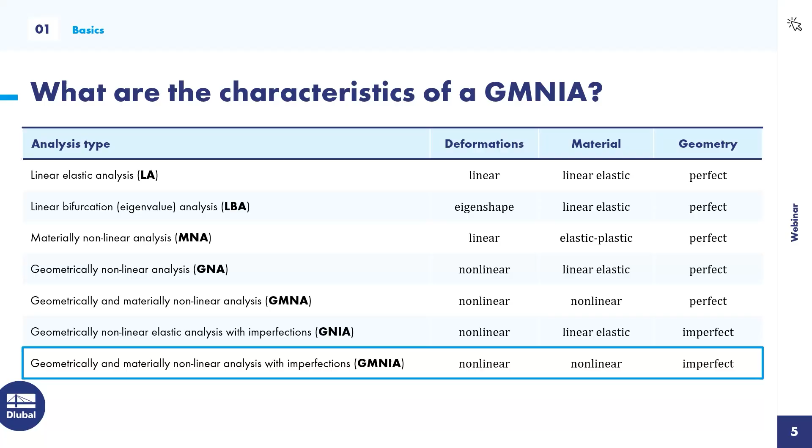Some rules for the application of the finite element method in this context are given in Eurocode 3 Part 1-5 Annex C, and this will shortly be replaced by a dedicated Eurocode dealing with finite element methods and their application for steel structures, bundled in Eurocode 3 Part 1-14 in the second generation of the Eurocode. I will refer to this new code as well during this presentation.

You can think of the GMNIA as a virtual capacity test, which means that the design load is increased by a load factor until a clear state of failure is reached. Two limit states are defined in Eurocode 3 Part 1-5 for the definition of failure and the determination of the critical load factor, which is the minimum of the following.

The load factor when the maximum of the load deformation curve is reached, as shown here on the left side of the slide, and the load factor when a maximum value of the principal plastic membrane strain is reached. This is usually given by the annex or the base code as 5%, which is tolerable, but there might be some additional requirements in the national annexes.

The critical load factor is then the minimum of those two alpha U values, and this is then checked against the product of two safety factors on the resistance side, namely alpha 1, which describes the uncertainty of the numerical model, and alpha 2, which describes the uncertainty of the load and resistance model.

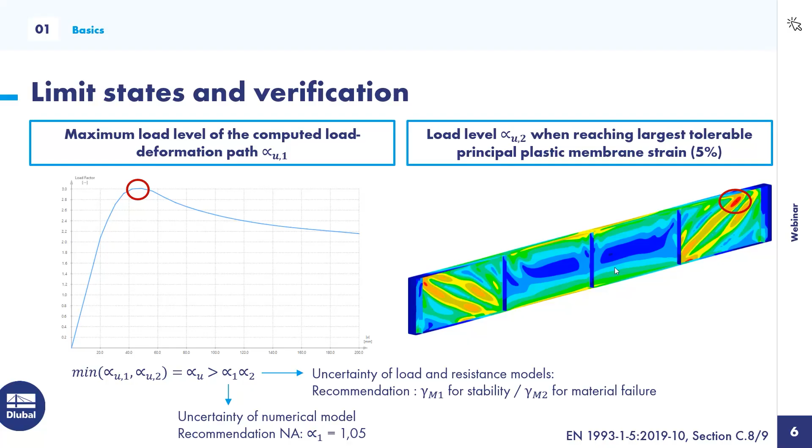So let's move on to the description of the design example for this webinar. We have a welded plate girder with a total length of 18 meters, simply supported at its ends. There are some virtual purlins that are not explicitly modeled that rest on top of the top flange at the ends and also in the quarter points, transferring loads from the roof structure maybe to the plate girder and also at the same time supporting it laterally.

To avoid local instabilities at those load introduction points, we place stiffeners below them, and we should also take care that the end posts or the end stiffeners are detailed as rigid end posts, so they can anchor back the membrane forces and avoid excessive deformations of the external shear panels.

The cross-section is shown here on the left side, so we have a very slender web plate with a height of 1 meter and a thickness of only 5 millimeters. And the flanges have dimensions of 20 millimeter thickness and a width of 360 millimeters. The material is a mild steel S235.

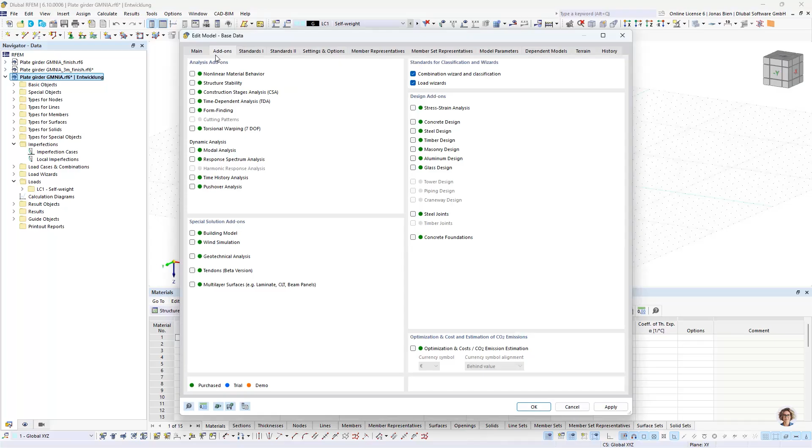All right, after we clarified this, let's go into the program and start modeling this. So I have already prepared a fresh file where we can now introduce the plate girder. As you can see, I have no objects here whatsoever, and also if we look into the base data of this file, there are no specific options activated. It's all a standard type of model, 3D and so on.

Okay, so first of all, let's start with the material. We said we want to use an S235, so let's choose one. I always like to choose one that is related to Eurocode 3, but another one would also work.

Then let's move on with the modeling of the member itself. We could either directly go with the surface definition and try to place the flanges and the web plates in the correct locations, and also then we have to assign the correct thicknesses and so on. But we can also use another way. We can first start with a member that has the correct cross-section, and then we transfer this member into a surface model.

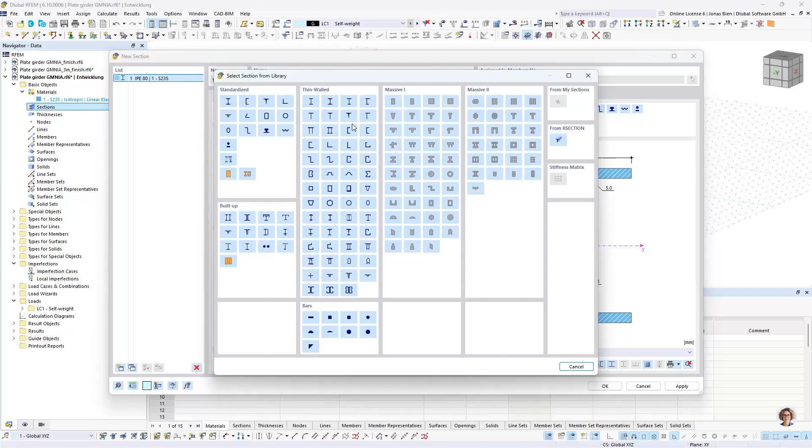So I start with defining a parametric welded double symmetric I section in my section dialog with the respective dimensions that I want to have. So height is 1020 millimeters, width 360, thickness of the web would be 5 millimeters, and the flanges 20.

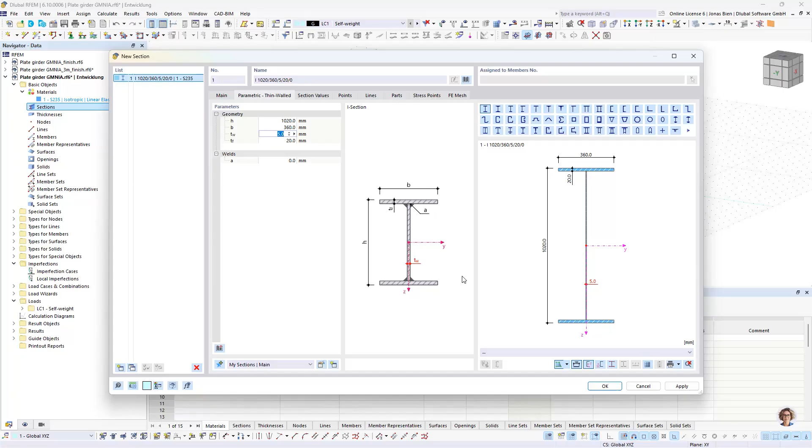So now it more or less looks like the picture that I have shown on my slides. I accept via OK, and then I just place half of my plate girder in the model. So one span was 4.5 meters, so I want to take in the initial model 2 panels, and then we can later mirror it.

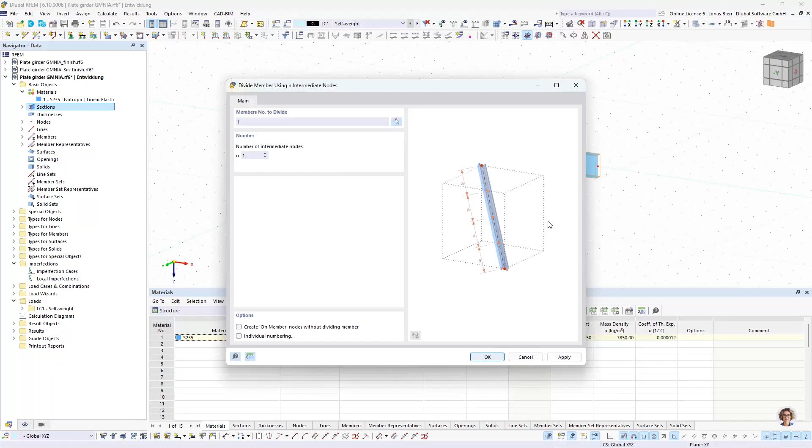So before I generate surfaces from this member, I also divide it, because I want to have a stiffener and some load introduction lines at the central position here. So I first divide this member with one intermediate node, and then I move on and generate surfaces. And what this does, it already automatically generates these thicknesses that I need to represent this section in a surface model. It creates the nodes, the lines, and finally the surfaces that are necessary for this model. So this is a good starting point, I think.

Next, we want to create the stiffeners to finish the surface modeling part. Therefore, I need an additional thickness of 12 millimeters that I wanted to use for the stiffeners. I can also write a reminder for myself that this is for the stiffener, this is the web plate, and this thickness is defined for the flange plates.

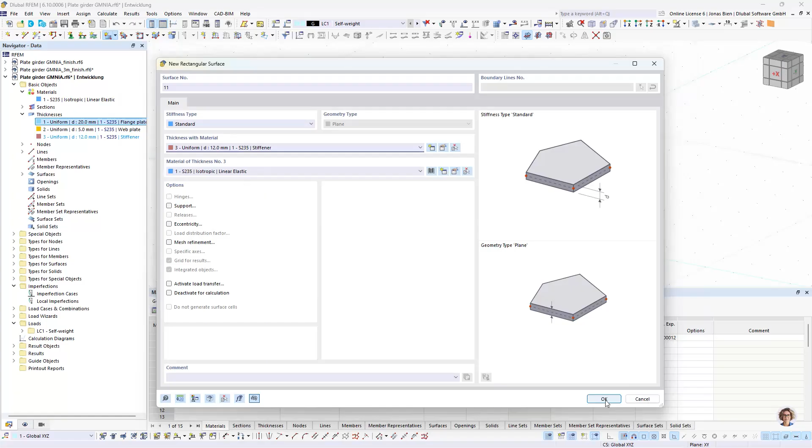Okay, and then I just place some rectangular surfaces in those positions where I later want to apply the loads. If we think about this as being the left half of our plate girder, we also said we want rigid end posts. So I would generate this by adding an outstanding cantilever part here with an additional stiffener to really have a very compact section at the end.

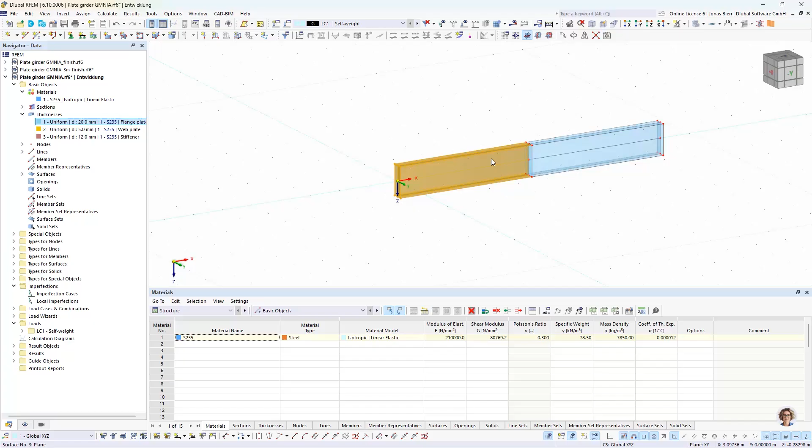I can come to this modeling variant by just copying this panel here to the end, knowing that the length of this is also 4.5 meters. I want to have a very short and compact cell here at the end, so I just move the end section back towards the initial position of this stiffener by, let's say, 4.2 meters. Then I have a nice rigid end post without needing to define additional surfaces by hand.

Oops, didn't mean to do that.

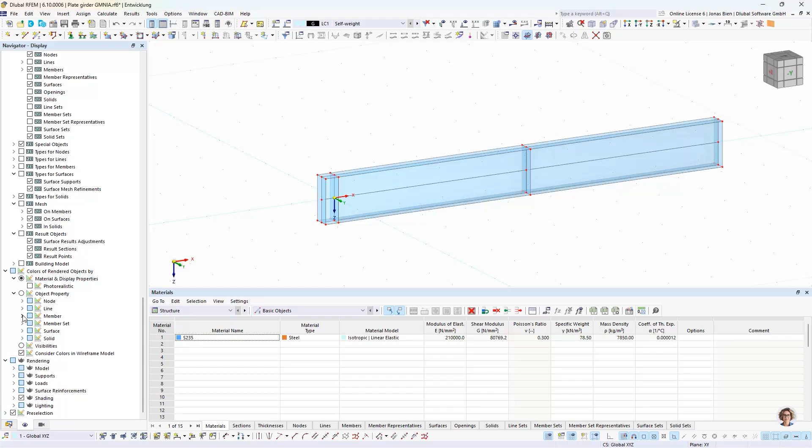So then we can check if we assigned the correct thicknesses. I always like to check the rendering based on thickness, so we get a nice overview of what thicknesses are represented in the model and where they are. This seems all fine to me.

So we can continue with assigning the supports. I want to avoid singularities at the vertical supports, so I try to use line supports at this second line of the stiffener here. I just want to support this line in Z direction, without restraining any deformation along the line or in transverse direction.

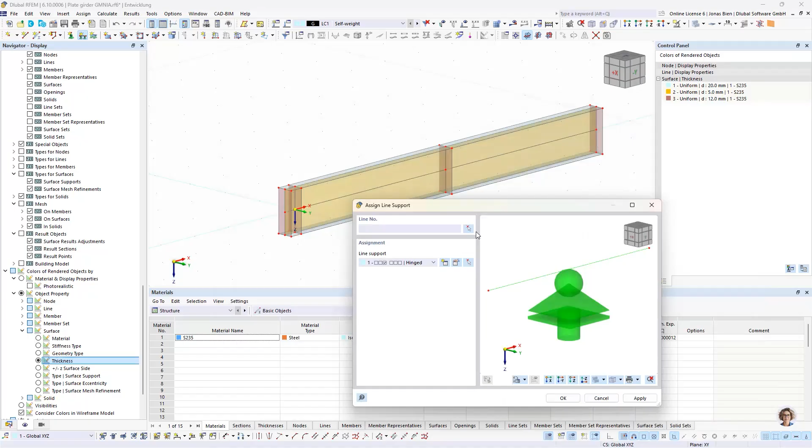I already see another problem because we defined those rectangular stiffeners over the existing surfaces, so we have some double lines here. We can quickly merge them by cutting and merging via this tool, and now we have single lines in these locations. That's a quick fix, so now I move on and assign the vertical supports at these two lines.

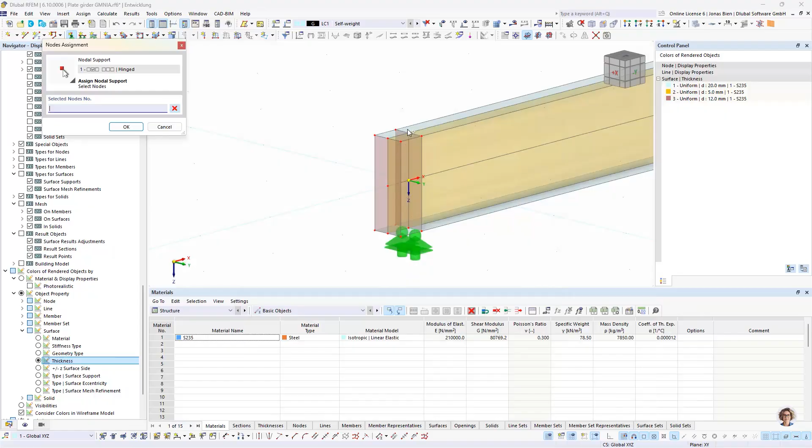Then I need to take care of the lateral supports. These I assign as nodal supports at some points that are very stiff. First of all, I have my lateral supports that I wanted to assign at the ends and also in the quarter points. I choose as a point of reference the crossing between flange and web plates and the stiffeners.

I also need to make sure to couple this point in Y direction so it does not tilt, and I also need to somehow support my model in X direction. That's why I also want to define one support in global X and Y direction at the lower flange, like here. So that would also be the respective support conditions that I want for my half model.

I can later mirror them when I want to create the full model. But before we do so, it would be wise to also define the loads, because there we can also leverage the mirror operation. So we go ahead and define our loads.

Maybe one look back to the task description. Here we can already see that we have concentrated loads, 3 different loads, at the endpoints and the quarter points. The first one represents dead weight, the second one comes from snow, and the third one comes from wind pressure.

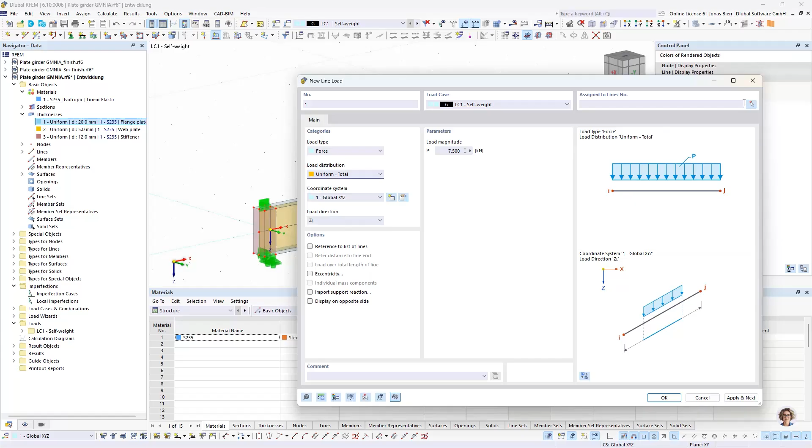But I could also use load distribution type uniform total, where the program does this job for me. I just have to enter the total load that I want to apply over the length of one line. Since I have 2 lines here, I need to divide my 15 kilonewtons by 2 to get the total load for one line. I want to apply this in Z direction, and now I just select those 2 lines, assign this, and RFEM already calculated the correct kilonewton per meter value for us.

If we multiply this value by 0.36 for the width of this flange, then we get 15 kilonewtons in total, as we wanted.

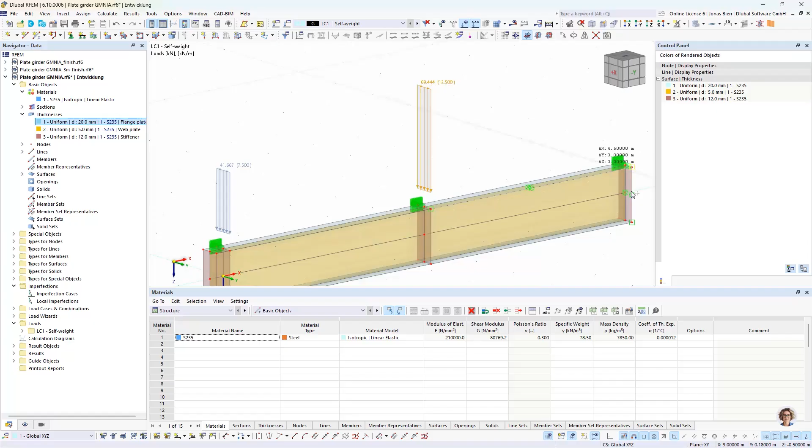Okay, we can then just copy this definition to the internal lines or purlins where the load is transferred to our plate girder. Here we had a slightly higher load, I think it was 25 in total. So each line gets 12.5 kilonewton. And this definition we can also copy to the central lines here.

And now we make a smart move and generate our second and third load case from our first load case. We do this by copying our first load case, which means that also all loads defined in this load case are copied. So we just have to change the action category. Now in the first place, I want to define the snow loads, and we have to take care to deactivate the self-weight if we copy from the self-weight load case. Otherwise, that would be considered twice.

And we do the same for wind, choose the appropriate action category, and click OK.

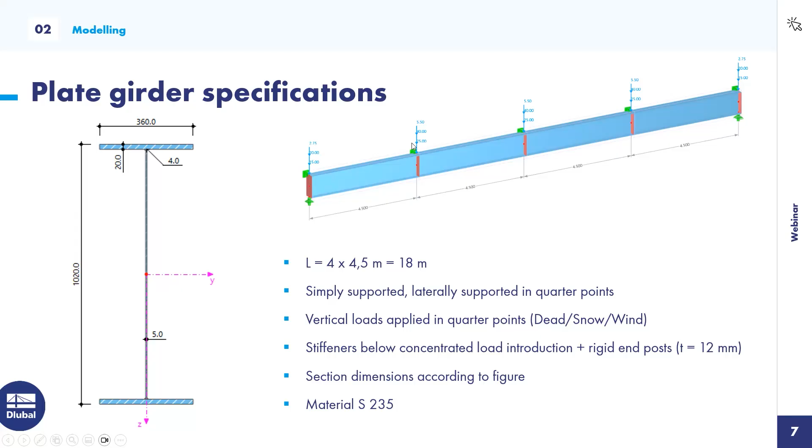And now we can go to the table. This is the easiest way I find to manipulate those load values, because we just want to change values. As you could see here in the slide, we have the same load type for all load cases, just different amplitudes. So for snow, we would have 20 kilonewtons and 40 in the internal positions, and for wind it would be 2.75 and 5.5 in the internal positions. So we just need to change the values basically. Let's do this via table.

For the snow load, we had 20 kilonewtons divided by 2 and 40 kilonewtons divided by 2 in the internal positions, and then for wind it was 2.75 divided by 2 and 5.5 divided by 2. This gives us the respective concentrated load distributed to those lines.

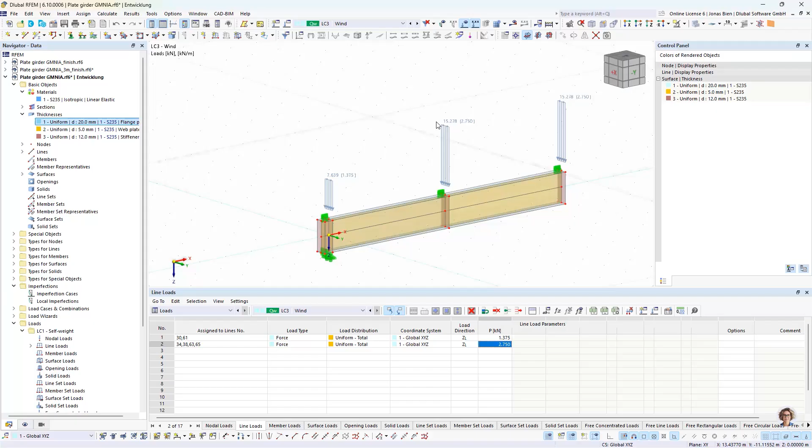All right, and I think then we can already mirror the whole thing. Maybe I don't want to mirror this load here, because we have already defined this for the central position. I don't want to do that again.

And now I mirror all the selected objects about the YZ plane, and the plane should go through this point here. I make sure to copy the included loading and click OK. And now I think by doing so, copying included loading, it also recognized all the loading on these lines and copied it, although I did not manually select it.

So now, as you can see, we have a double load here, and we just quickly delete this. Okay, then I only need to do one additional modification of this mirrored part.

I don't want to hold the plate girder in X direction on both sides. I don't want to activate any membrane forces here coming from large deformation in X direction. So instead of using support in X and Y direction here at the end node, I just copy the definition from above and place a nodal support that supports in Y direction here instead. So it is free to move in X direction now.

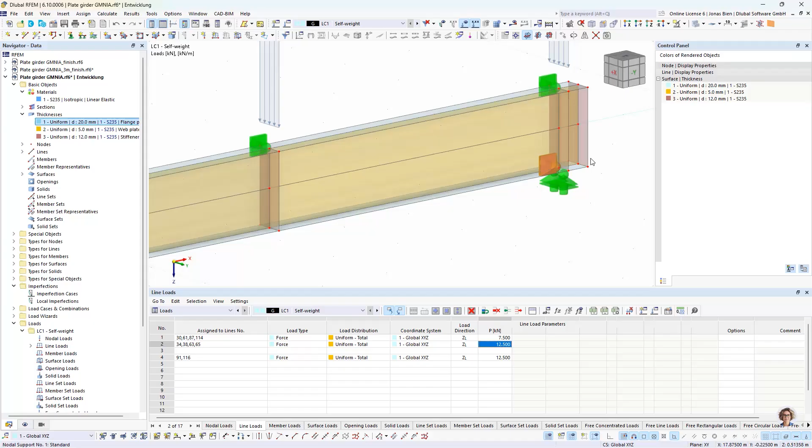Okay, then one more important part when creating a surface model in the context of steel design: usually our base settings for the mesh are not really suitable. This element length of 0.5 meter is more suitable for, I don't know, concrete slabs and foundations. So not for us. Otherwise, we would only have 1 or 2 elements over the height of our plate girder, and that wouldn't be sufficient to get a good model here.

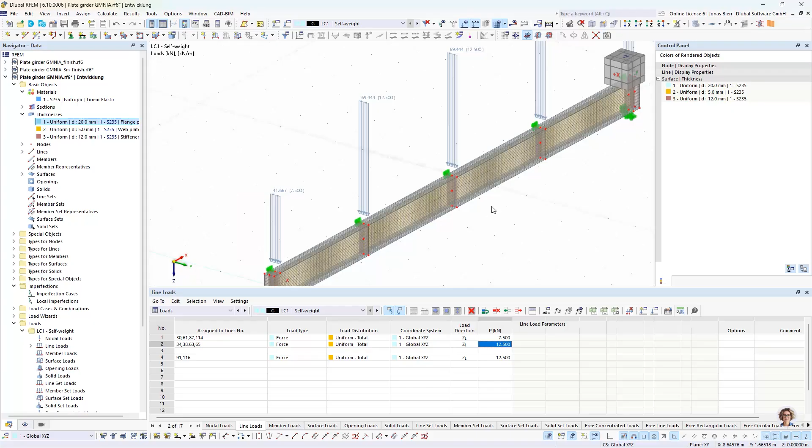So we just use 5 centimeters in the first step and check the mesh visually to see if it is reasonable. I think in the first step this is all fine. It is always advisable anyway, in the context of a GMNIA, to make some sensitivity study of the mesh refinement at some point, but I think this is a good starting point, this level of refinement.

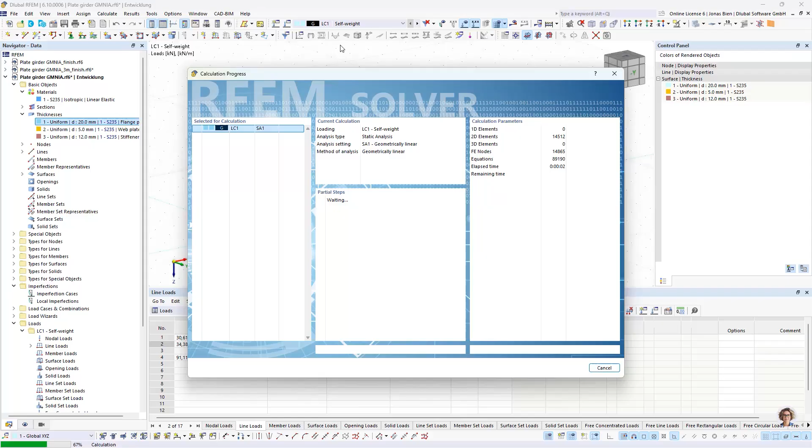We can also check if we defined the model properly by just running one test load case, for example load case 1, and see if everything is connected properly and if we have supported the model sufficiently. It looks quite okay to me. The deformation shape looks as expected. As I said, it can deform in X direction here at the end, so no restraining forces in that direction. We can also check the stresses in X direction. We have only bending here, so everything is as it should be, and this is fine.

Then maybe we need to think of a combination of our load cases. So let's go there as well.

By default, we have 4 different design situations that RFEM generates for us in a new model. We only want to do checks in the ULS combination, so we only want to check our model for strength. So we leave that in.

And that gives us, with the combination wizard activated by default, 5 different load combinations. But for us here, it's very easy to see that load combination number 3 results in the largest loading, or is the most critical loading combination for our case.

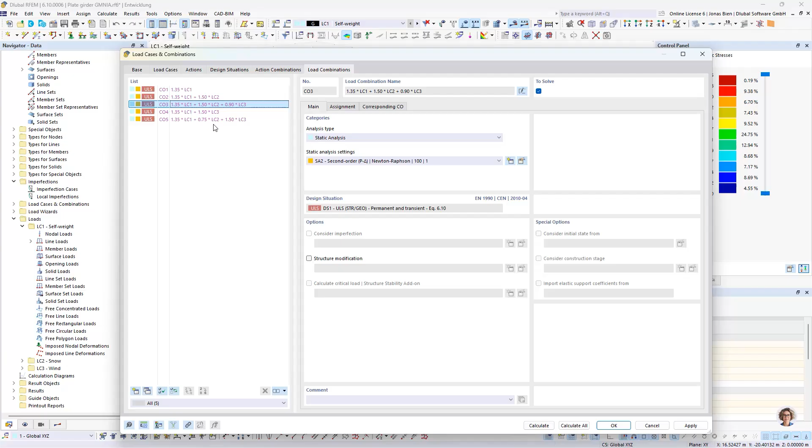So because I know that GMNIAs are quite heavy on computational time, I want to reduce the load combinations I need to take into account to a minimum.

So I deactivate the combination wizard, say I want to keep all the load cases and load combinations, and then I manually delete all other load combinations and only leave CO3 for later analysis. And then in the first step, I use first order theory for analysis.

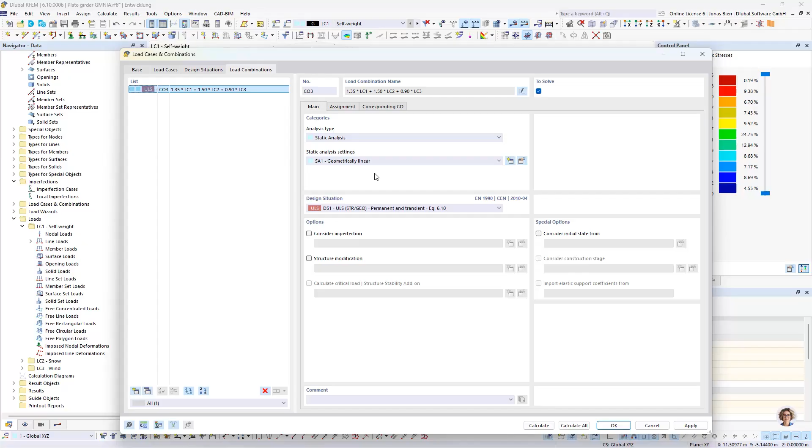Okay, I think that's it for the definition of our base model, and we can now tackle the special ingredients of the GMNIA.

So let's start with the imperfections. According to Eurocode, residual stresses resulting from the manufacturing process of steel girders need to be taken into account. These residual stresses originate from uneven heating and cooling of the material during manufacturing.

In a plate girder, very high local temperatures and corresponding material expansion occurs when the web and the flange plates are joined by welding. The individual cross-section parts are joined in this heated state.

And if the component then cools down again, constraint-free contraction of the material is no longer possible, and residual stresses remain in the cross-section. Those stresses are, in sum, in equilibrium with each other across the cross-section.

In principle, it is possible to consider such residual stresses in RFEM, although a bit cumbersome. But since we occasionally receive customer requests about this, I would like to show you in a short excursus how to approach this problem.

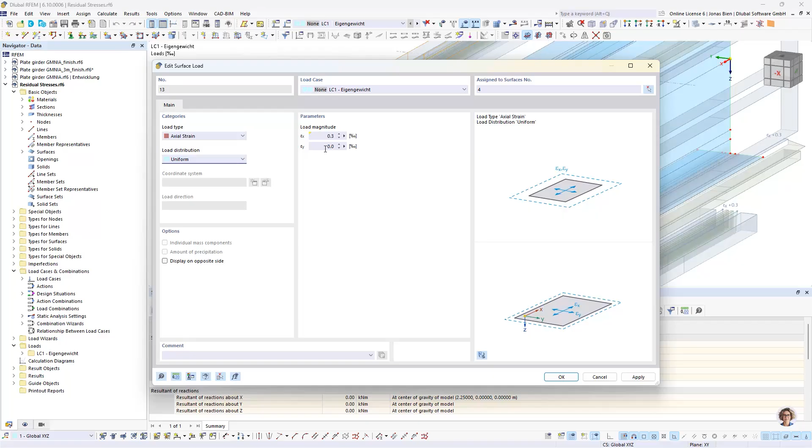And in this case, for this constant strain or stress block, I defined only a uniform distribution with a magnitude of 0.3. And if we check, I've entered this via formula, so I just divided my yield strength by the Young's modulus and divided it by 4.

This leaves us with a positive strain, and the positive initial strain leads to later compressive residual stresses. We will see that when we run the simulation.

Similarly, I did the same in the middle of the flange plate, where I defined a block of axial strains with a negative sign now, described by yield strength divided by Young's modulus. And then in between, I applied this linear load distribution.

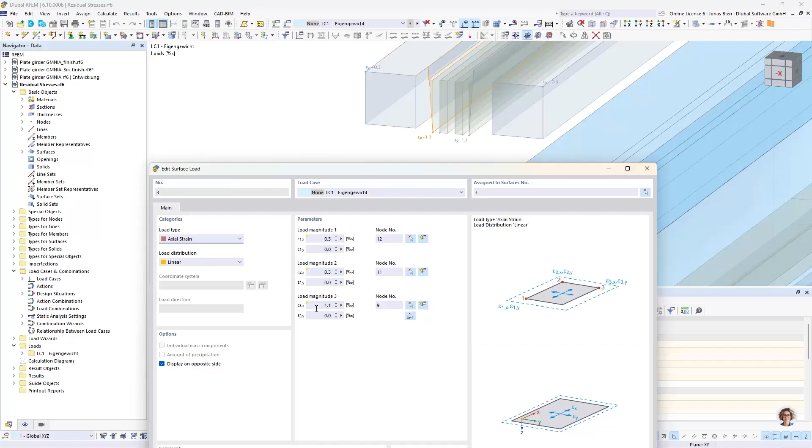I used 3 corner nodes to describe the distribution of my loads. You can check this out in the German webinar if you're interested, but it's pretty straightforward. I defined 2 nodes with a tensile strain and 1 with compressive strain to get this distribution over the flange plate, and I did the same for the web plate as well.

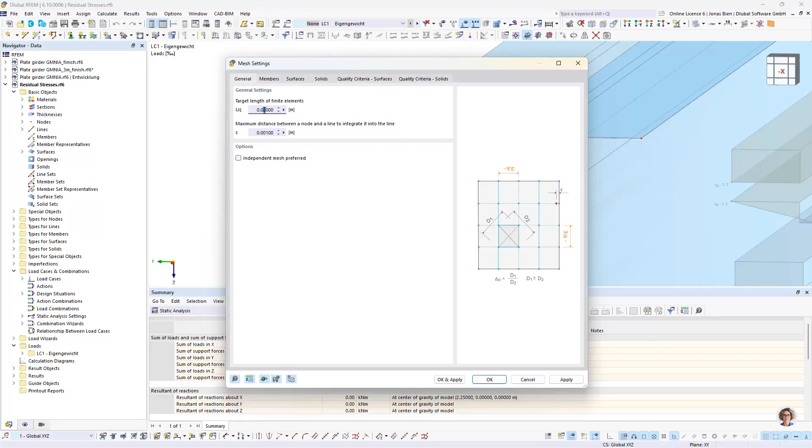So what I've done also was change the mesh size a bit. I chose very small element edge sizes, so I have at least 2 elements over each surface. This way we can also see this linear, or gradient, stress distribution here. We can represent this with the mesh size, and that's basically it.

Let's check the results. I've already computed it. Maybe one last note: on this end of the girder, I applied some line support, where I held every node in place, also in X direction. This is very important, because by doing so on this end of the girder, I restrained every warping of the section and every deformation in X direction, in longitudinal direction.

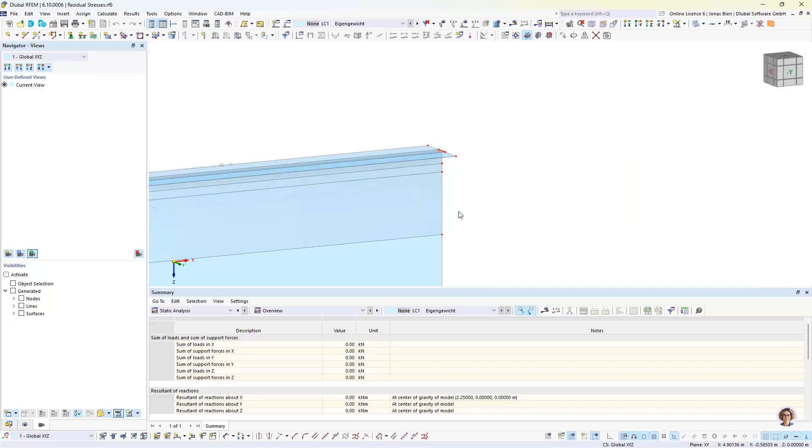On the other end, I didn't do that. So here all my filaments or fibers of the section are free to move in X direction. We can see that this has a great influence on the resulting stress state. Here, where we have more or less a disturbed state, where movement is free in X direction, you can see that those residual stresses actually vanish and diminish at this free edge.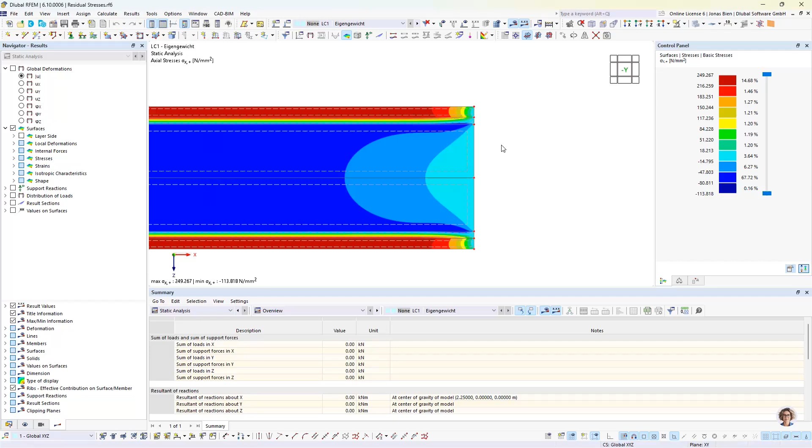But this is what happens in reality as well. If you have such a girder and you cut it in some plane, these residual stresses would be freed, and you'd actually see that in the deformation shape. The section would go into the shape it wants after relieving the residual stress state, and that's how it would look at this free edge.

Of course, this is exaggerated here, so the resulting deformations would be very small, but that would basically happen in reality as well. On the other edge, I held every node in place, so it cannot happen there, just to show you the difference and the behavior we get by simulating this effect.

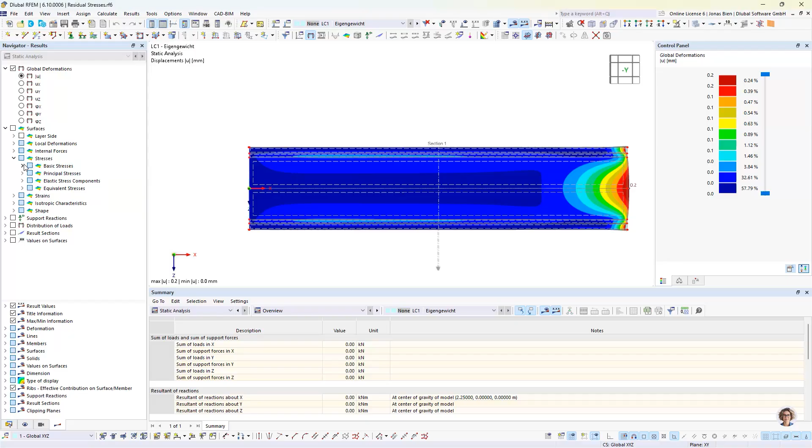Let's check the stresses again. I've now shown the stresses in X direction, and we can already see that we have compressive stresses in these blue areas, and in the red areas we have tensile stresses. It's not very easy to see the actual numbers though.

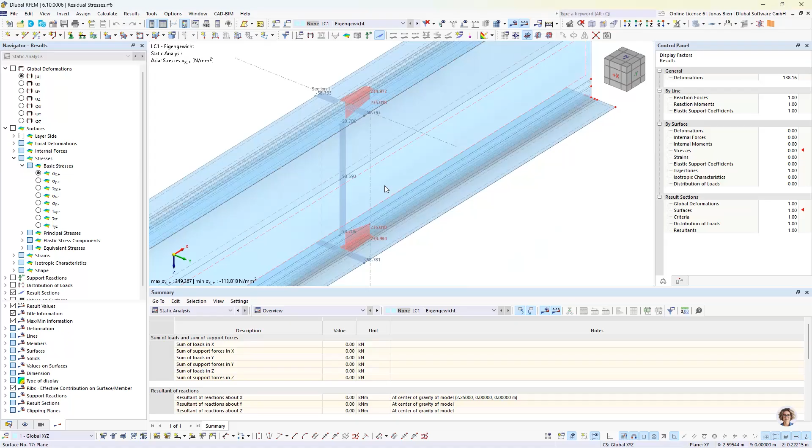That's why I also inserted a section here in the middle, with a certain distance to the member ends, to have an undisturbed region. Let's check the stress state in this section. Here we actually see that in these tensile zones between flange and web plates, we have almost exactly the yield stress as a residual stress, and in the compressive parts, we have Fy divided by 4. This is exactly what we wanted to simulate, as we saw back in our PowerPoint slide. So this is one method to apply such residual stresses in a surface model of this kind.

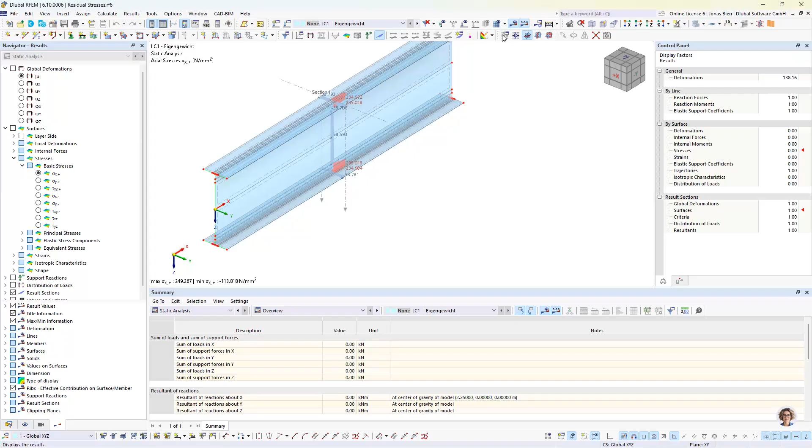Another way would be to not use this load type of axial strain, but to define a similar thing via temperature increase. We could apply some temperature, and then with the material properties, we could simulate a similar elongation that the steel would like to make. Since it's restrained over the cross section, we would get a similar residual stress, just that we would need to add an additional step and take into account this alpha elongation or expansion factor of the steel, which makes it a bit more complicated. So this is the easy way to do it.

All right, but this was just a small excursus. Let's get back to our actual model. Of course, I will also upload this smaller residual stress model with the slides, so you can study this for yourself.

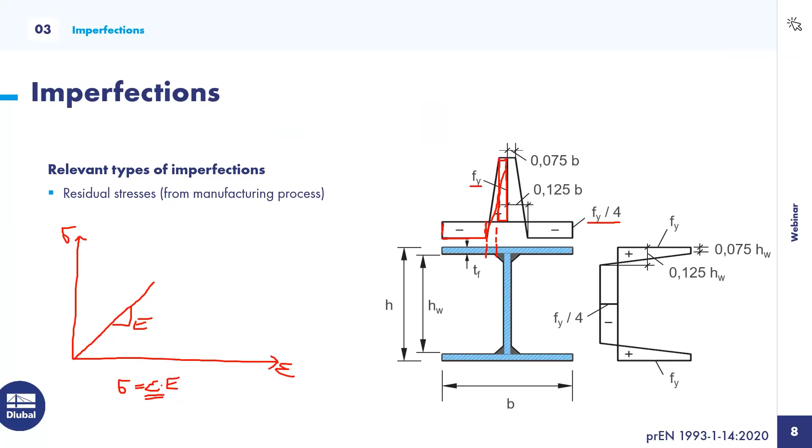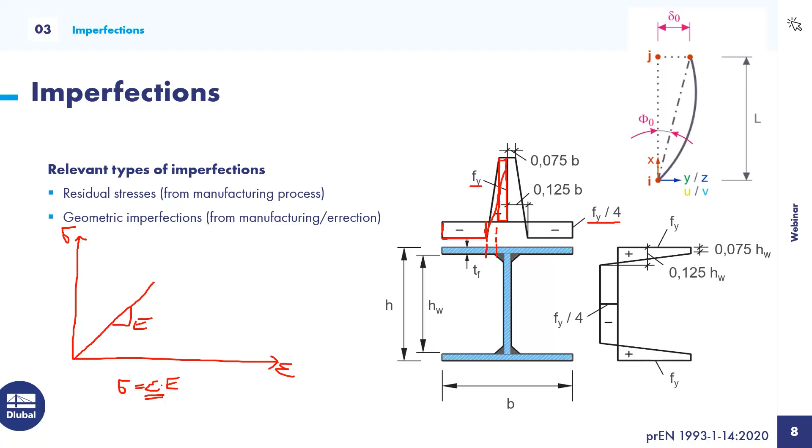We have now talked about one relevant type of imperfection, which is the residual stress that comes from the manufacturing process, as already explained. In addition to residual stresses, we also have to take into consideration geometric imperfections. These simulate deviations from standard dimensions or misalignments of elements during erection on the construction site. We know such geometric imperfections from Eurocode 3-1-1, for example, and this is exactly what is meant by this type of geometric imperfection.

So we could either specify residual stresses and geometric imperfections separately, but we have seen how cumbersome the definition of residual stresses can be. And for some sections, we might not even have a clear statement for how to approach this residual stress problem. For a double symmetric welded I-section, we have a definition given in Eurocode 3 part 1-14, but there may be cases where this is not applicable.

So luckily we have an alternative, and Eurocode 3 part 1-5 also allows us to take into account the residual stresses not explicitly, as we just did in this small model, but by increasing the base geometric imperfections. So we just apply geometric imperfections and increase them by some factor. Both types of imperfections are then summarized as equivalent geometric imperfections.

And this is the approach that we want to take for our plate girder. So let's look into those equivalent geometric imperfections in more detail. The good thing is that we don't need to increase the geometric imperfections ourselves, but the magnitude for those imperfections is actually given in Eurocode 3 part 1-5, and these already contain the residual stresses.

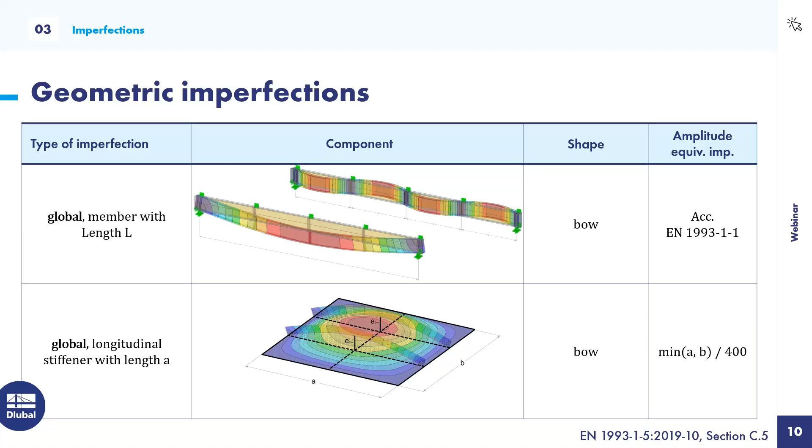According to Eurocode 3 part 1-1, such imperfection should be defined affine to the imperfection for flexural buckling about the weak axis, but with half the amplitude. So to find the specific amplitude, we go to Eurocode 3 part 1-1, check table 6.2 to see what buckling curve we actually have for buckling about the weak axis. In our case, we have a welded I-section with flange thickness less than 40 millimeters, so we would choose buckling curve C.

Next, we would check table 5.1 of Eurocode 3 part 1-1, and we would then choose the imperfection value for a plastic section check. In the end, we are doing a nonlinear analysis with nonlinear materials, so we are also accounting for redistribution in the cross-section, which means we basically want to do a plastic section check. With this information and the buckling curve, we can then read the imperfection amplitude for our equivalent imperfection as 1/150 for buckling about the weak axis.

And we would then need to take half of this for our lateral torsional buckling imperfection. The last question is then: to which length does this value refer? Our flange is under compression and held at the quarter points, so we apply the imperfection alternating between those intermediate supports, as also shown above in the figure on the slide.

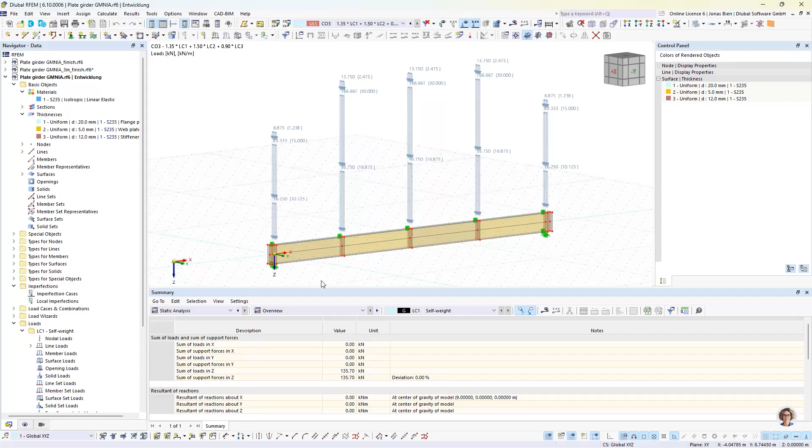Let's do that, and it will get clearer how the concept behind this works during modeling. First, we define an additional load case where we apply a load that gives us a deformation shape of the structure, which is more or less equivalent to the imperfection shape we want to apply. I start with defining a new load case and name it bow imperfection, static, to remind myself.

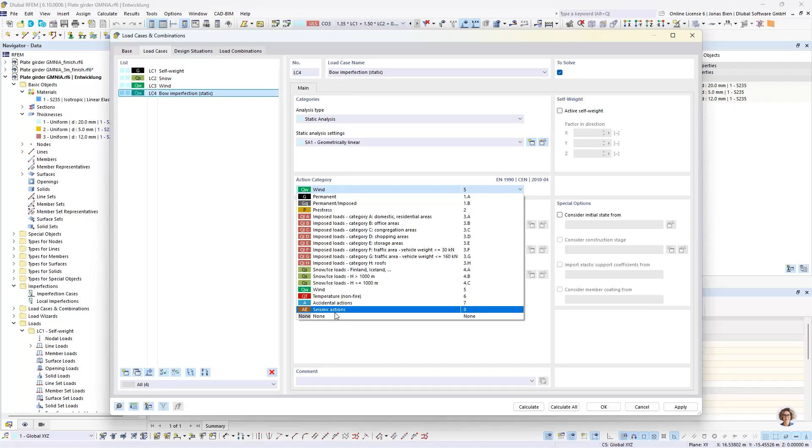For the action category of such load cases I choose none, because that way I avoid it accidentally getting combined with other things if I have a load combination assistant activated. Now in this load case, I define some loads that give me the deformation shape that I want to take as an imperfection shape. I'll just scale this to a default value. It doesn't matter how large this deformation appears in the static analysis step, since we can scale it later when we apply the imperfection case.

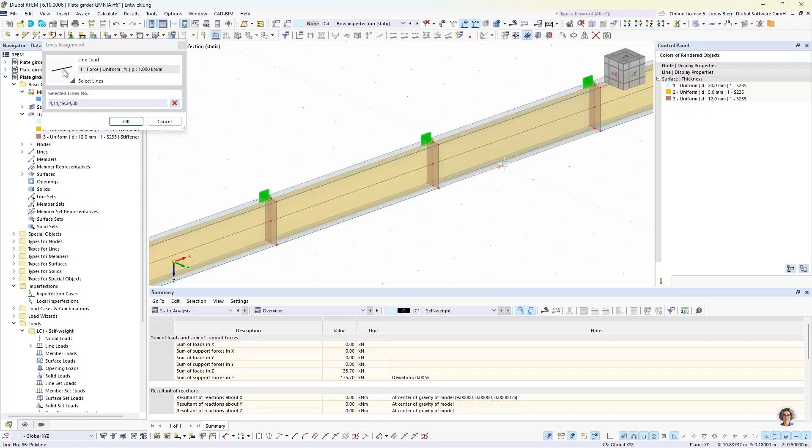First, I want to deform my girder in the y direction by defining loads on those lines between web and flange plates. This way I avoid having the section itself deform — I want more or less a member deformation without distortion of the cross section. So I just apply this dummy load in one direction, and then alternate the direction of the deformation.

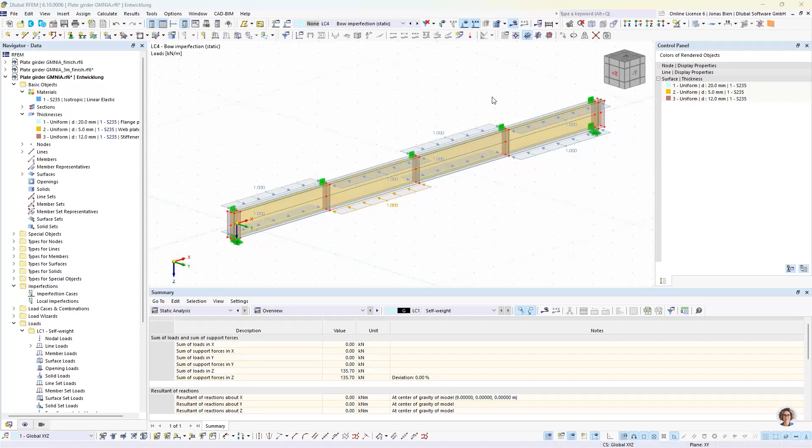Now if I run this analysis for load case 4 that I have just defined, we hopefully see some kind of bow-shaped deformation here. Let's check the global deformation — and yes, this looks exactly as expected. I get a bow-shaped deformation shape with zero points at the inflection points and the quarter points where I wanted to have them.

So this is a good basis for my imperfection shape. You can also see that the maximum deformation here is quite small, which is of course too small for the imperfection that I need. We said we want to define the length between these inflection points divided by 300, and that would be 4.5 meters divided by 300, so 15 millimeters. But that can actually be set in the second step, where we define the imperfection itself.

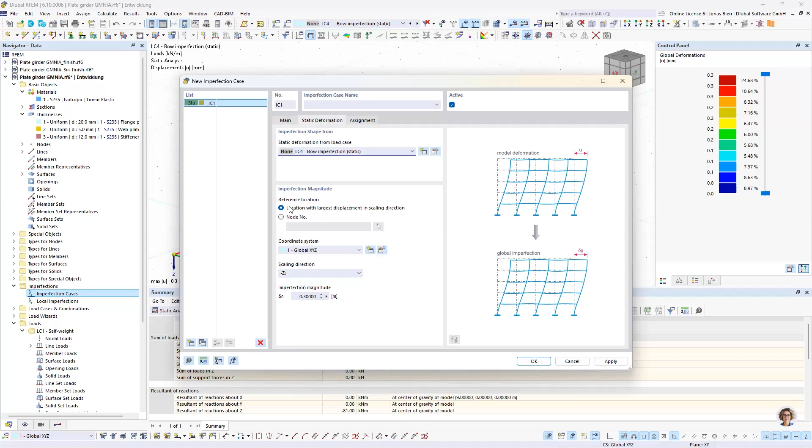In this case, we want to use an imperfection type of static deformation. There we have to reference a load case or load combination where we want to adopt the static deformation from, and then we need to scale it somehow. So I want to source my deformation from load case 4, and I want to scale it spatially, just as it appears here when I check the total deformation plot.

I want to set the magnitude, which I can handle via formula, to 4.5 divided by 300, giving me 15 millimeters. Now I have this imperfection case 1, and I can calculate or simulate it, and it will scale the deformation shape from load case 4 to the value I want, 15 millimeters — and that's exactly what we get here.

It's nice to check this, and then we can apply this imperfection as we usually do — here, for example, to load cases or to load combinations with this option. But we are not finished yet; we need some other imperfections that we need to apply to our structure.

So let's go back to our presentation. The first step is done — we have the global bow imperfection considered, but there are two more geometric imperfections in Eurocode 3 part 1.5 that need to be taken into account if applicable to the problem. Those are the local buckling shape deformations in the buckling panels, or in potential buckling panels. If we use geometric equivalent imperfections, the amplitude of such imperfections should be the minimum dimension of the panel divided by 200.

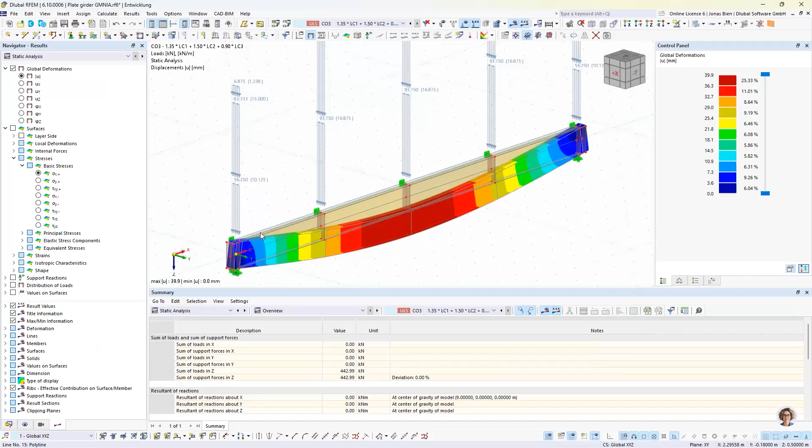Now, in addition to the static analysis results, I also get stability analysis results. If you are interested more in this linear bifurcation analysis and what we can do with it, check out my last webinar on this topic. I think it was called something like linear bifurcation or buckling analysis in RFEM 6 and RSTAB 9.

There you can get a lot of background information and additional info. So what we basically get now are 20 bifurcation factors with the respective mode shapes. Now the question is, which mode shape do I need to take into consideration for my nonlinear analysis? We can already see that the first 12 mode shapes only affect the external or outer buckling panels, while the 13th shows first modal deformation in the internal buckling panels.

The Eurocode doesn't offer really huge help here. It just says that the most critical imperfection needs to be taken into account, which is often not quite straightforward to determine. So if we are in doubt, we would need to take into consideration different mode shapes and also maybe different imperfection directions. But for now, or for the start, it's always a good bet to just go with the first mode that has the lowest critical load factor in the structure.

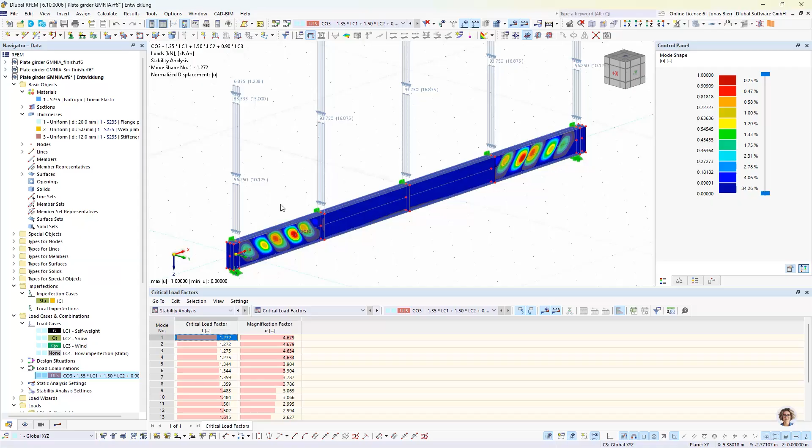So we will now, for the first shot, go with this first imperfection here. How do we get this buckling shape, or how do we bake this into an imperfection? We again define a new imperfection case, this time of the type buckling mode. This is now available since we have activated the structure stability add-on.

It wasn't before, so let's also give those imperfection names - local imperfection - and finish the definition. Again, as in the static imperfection case, we need to source the deformation from somewhere. In this case, we source it from load combination 3.

And we said for the start, we just take buckling mode number 1, and we also take an arbitrary deformation direction. We scale it spatially again, and as an imperfection magnitude, we set the minimum of the panel dimensions.

So panel dimensions would be 4.5 by 1 meter, divided by 200. It's always very convenient to just use the formulas to plug this in, and you don't need your calculator. You have a reminder if you are unsure - you can check the formula again and so on, so this is very handy.

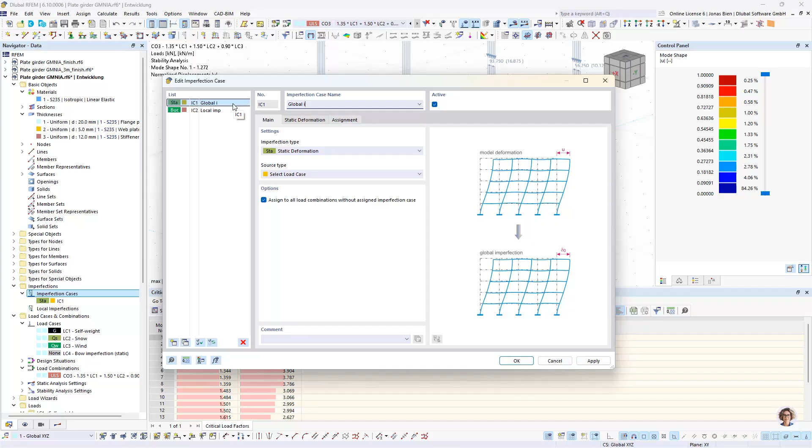Okay, so that would be this definition. Then let's also rename imperfection case 1 to global imperfection, so we can have a quick distinction between those.

And now if we also solve this second imperfection case, we should get the eigenshape that we just saw now, but scaled to 5 millimeters maximum deformation. So that's perfect. All right, so two imperfections are now already defined.

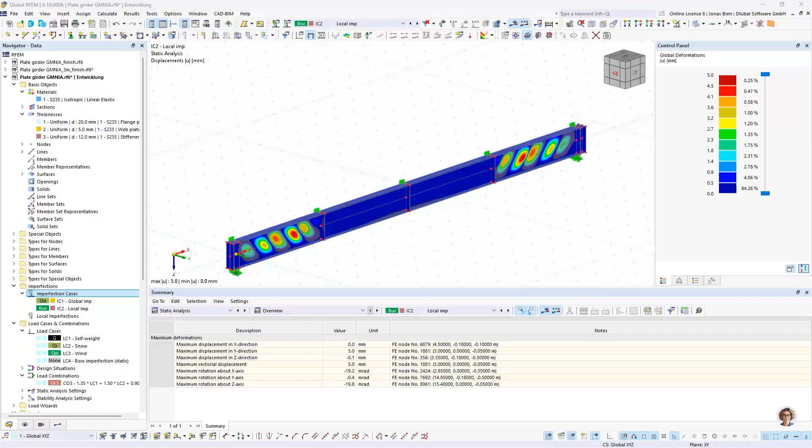So in our case, we have some transverse stiffeners, and between those stiffeners we need to account for this bow twist, and the bow twist should have an amplitude of 1 divided by 50 times half the flange width. And the question is again, how do we do this in our program?

Because neither the static nor the buckling imperfection type are really helpful in this case, but what we can always do in this kind of analysis is burn or engrave the imperfection into our basic geometry, and I want to show you this as a third option. This means, of course, we need to redefine the model itself, but also in this case, or with the right strategy, that's also not a lot of additional work. In our case, we can just change the type of this line from polyline to arc.

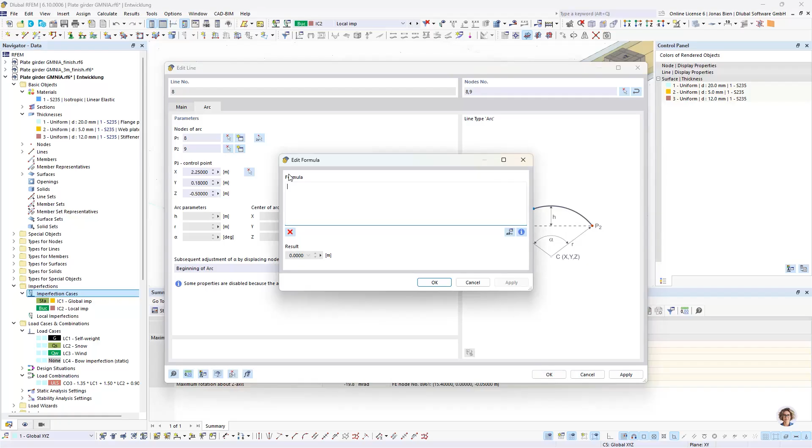Then we set a control point in the middle of this mid length of this arc, and then we set the arc segment height to the imperfection amplitude. So basically we need to change this z that coordinate of our control point. I again do this via formula, and I add to it the flange width divided by 2 divided by 50.

And apply this change. And now we will see that when we look from the side, this is not a straight line anymore, but it's like curved, and this will lead to a twisted flange in the end.

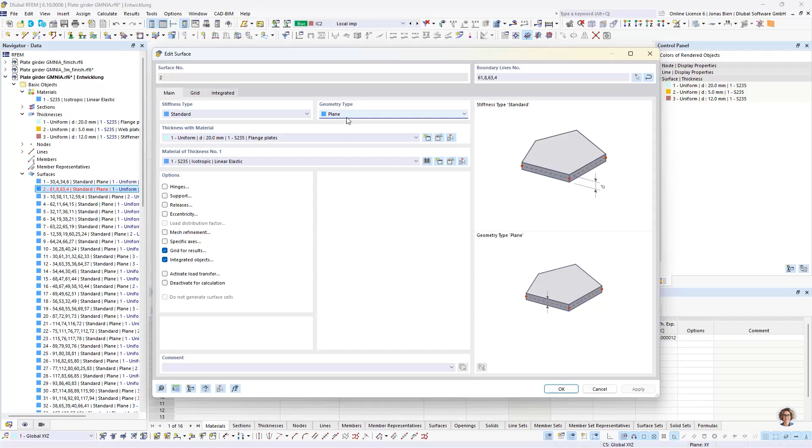So that's perfect for our imperfection. But we also see that now we have some problem, because our surface here is gone, and this respective surface is now marked with the red color here. That is always bad, but it's very easy fix in this case, because we defined initially this surface as a plane surface. This is no longer true, because one of the boundary lines is now an arc, and we can just fix it by changing the geometry type of the surface from plane to quadrangle, and this resolves the issue.

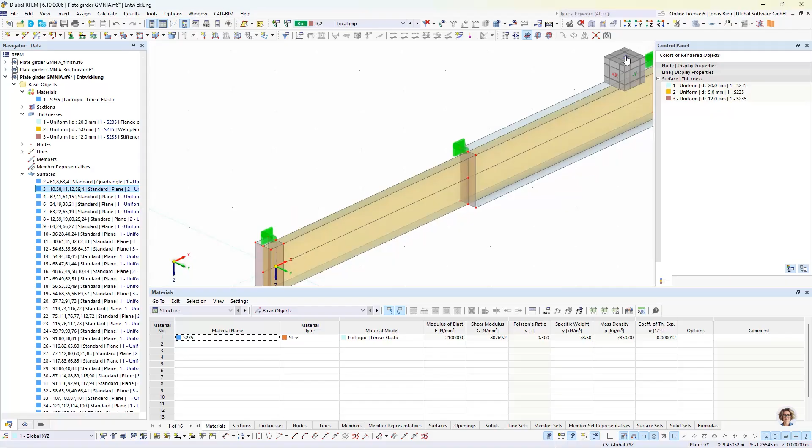And now the question is, how do we proceed from here, because there are many surfaces that we need to change. But instead of doing all of this manually, we can again be a bit more clever and use some modification functions to copy this imperfect geometry to the other locations along our member.

So in the first step, we could mirror this surface, rotated over the x-axis. I think that would be the most appropriate approach, by 180 degrees. I create a copy. So this should be the axis of rotation, and the axis of rotation should go through this point.

So I click OK, and now I see that there's an imperfection on this side of the flange as well, but in the different direction. That's how I would assume this flange twisting would look like over the complete width.

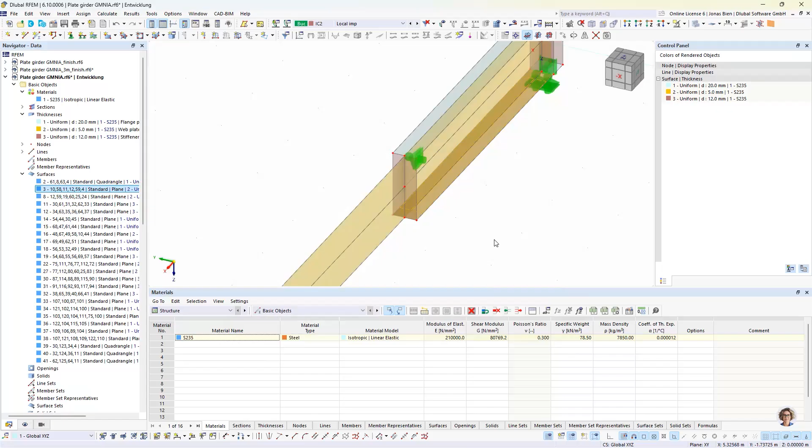And now I can just copy those two surfaces from the upper flange to the lower flange. And in the last step, I take all those flange plates and rotate them again, but now over the z-axis, so the vertical axis, and I carefully choose my location of the rotation axis, like so.

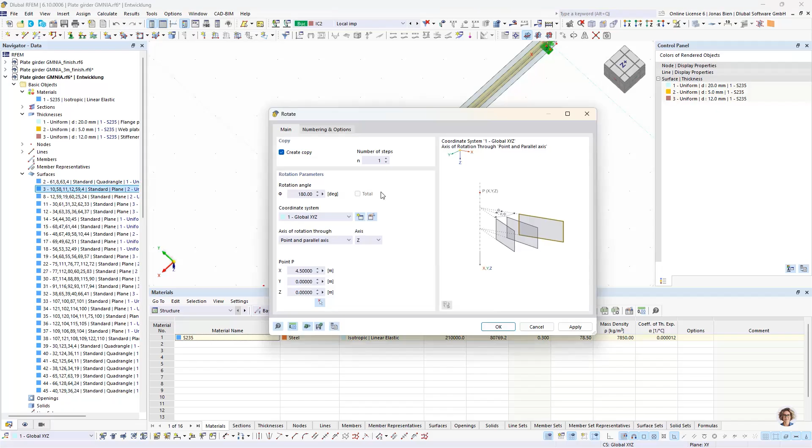And now I have to do this 2 times more to do this definition for the whole member length. As you can see, with leveraging these tools in RFEM, it's quite easy and quick to create such imperfect geometries.

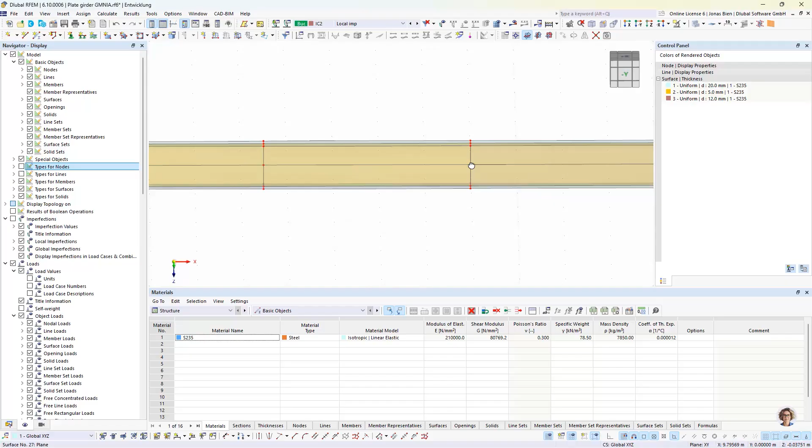So let's actually check how does this look now. We can clearly see that there is some flange twisting now modeled here, exactly as we want. It alternates between, or from one inflection point to the other one. So this should be the most critical case in this scenario here, or the most reasonable assumption for such flange twisting imperfection.

Okay, so now last question is, how do we combine all these imperfections together? In Eurocode 3 part 1.5, we have a combination rule for equivalent geometric imperfections. We have one primary imperfection that we assign with 100%, and the other ones we take 70%.

But just to make things a bit simpler here, I would just take them all with 100% amplitude, because most of the time, or in most of the cases, there's always 1 or 2 imperfections that are not really relevant or critical for the end result.

So we could either put in a lot of effort to select the most critical one and apply 100% amplitude magnitude to this, or we can just on the safe side assume the full 100% for all imperfections, and the ones that do not really harm our simulation will just more or less do nothing. Of course, we could refine it later if we want, or if we find that our solution is not economic, but due to time limitations, I don't want to do that here.

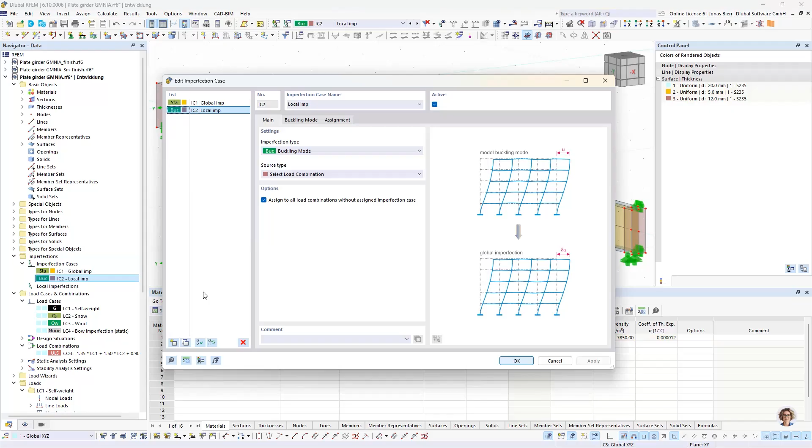So instead, I just generate an additional imperfection case with a group of imperfection, where I now superimpose the 2 imperfection cases, imperfection case 1 and 2, and I can do this very conveniently over this table, where I just define imperfection case 1 should be present together with imperfection case 2.

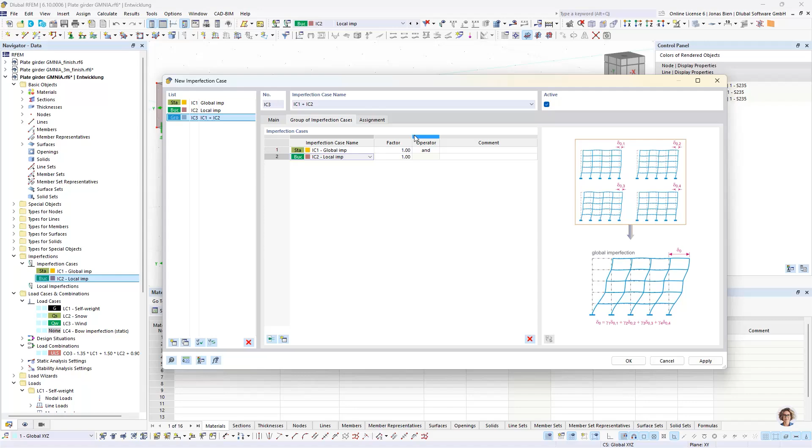You could change direction here very easily by modifying this factor, or also you could lower the amplitude by just putting here like 0.8 or something. If you would just want to apply 80% of the imperfection, that would also work. And then I just need to assign this group of imperfection to the load combination that I want to use for my GMNIA.

For now we only have this load combination 3 that we used, and we also need the buckling shape imperfection. So we need to have this still defined, so I will not alter that or take this as my GMNIA load combination, but instead I want to copy it. This one I then want to run the GMNIA analysis on, meaning I want to consider the full set of imperfections. The flange twisting is embedded or engraved into our model, and the other two imperfections are now taken into account in this load combination here.

Then for a GMNIA, as we heard in the introduction, we need to take into account geometric nonlinear solutions. So we want to solve this assuming large deformations, which means I just need to change the static analysis settings to large deformations.

Of course, there are a lot of parameters you can play around with. You can change the solution method, the solver method, but in our case we will stick with the default options since we don't have too much time to explain all the differences. Our online manual gives good guidance, and I think also in our old webinar I tackled this a bit.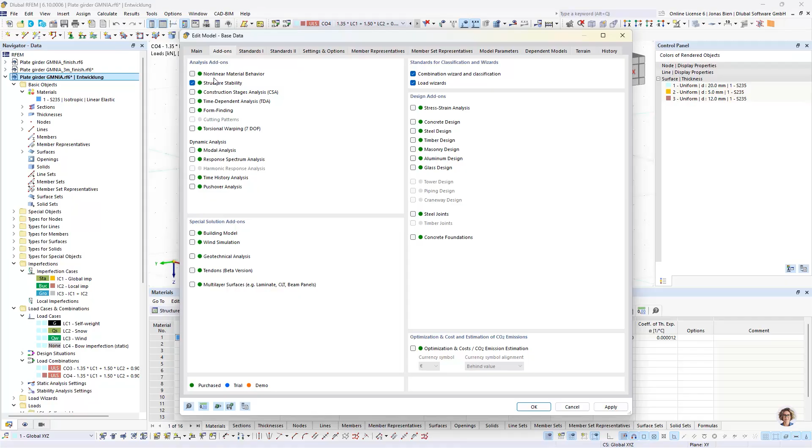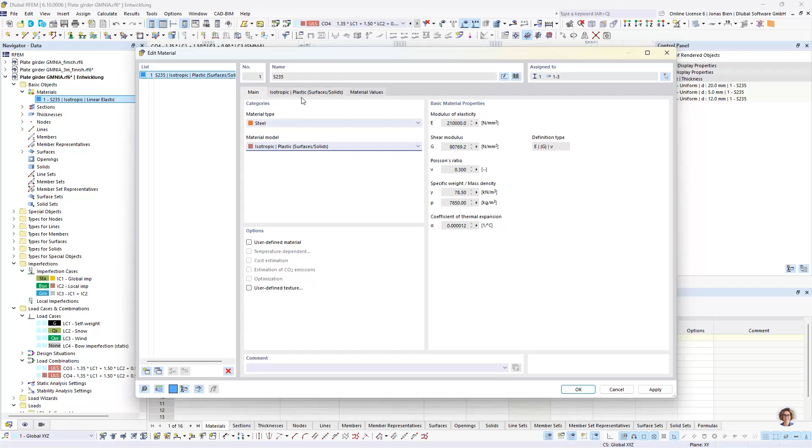But we of course need also a nonlinear material, and to access all the nonlinear material models in RFEM we need this additional analysis add-on, and we also need to activate it for our model. When we do so, we finally get access to all those nonlinear material models. For our job, I want to use a plastic isotropic material model for steel, for surfaces and solids. The von Mises failure hypothesis, or yield hypothesis, is quite fine for us.

I don't want to spend too much time with the material definition. I talked about this also in our older webinar. So if you are interested to see what options the Eurocode gives us and what is suitable for such an analysis, I would highly recommend checking the old webinar.

But now I will just go ahead with a bilinear stress strain model, and I want to use a hardening modulus of 1/1000 of our initial modulus of elasticity, which is valid with regards to the Eurocode rules. Because I have now taken a user-defined hardening modulus here, I also need to reset my yield strength, since I made my material model a user-defined material model.

Okay, and this would be all the steps necessary to set up the GMNIA analysis. The solution of this problem as we defined it would probably take like 4 or 5 minutes, and I don't want to bore you with this simulation, so I have already calculated this, or a calculated version of this.

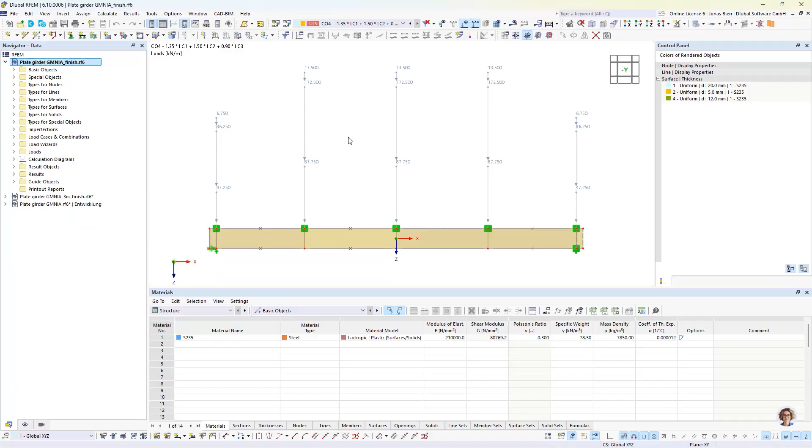It should be more or less the same model. The only thing different, I think, is that I also baked this bow imperfection into the geometry, and only the local buckling shape imperfections are defined as an imperfection case. But in addition, everything is parameterized in this model, and this is also the model I will hand over to you with the presentation and so on, so you can play around with these numbers and do your own investigation on your own geometry and your own plate girders if you like, and you can vary stuff very easily.

So with this being said, let's check the deformations or the results of our load case number 4. Since we have conducted a nonlinear stability analysis, we also have results for that. And what we already see is that the highest load increment that converged was 15, with a load factor of 1.95, which is quite far away from 1. Or even if we consider the safety factors that I initially mentioned, it's quite far away from that. So that's already a good sign.

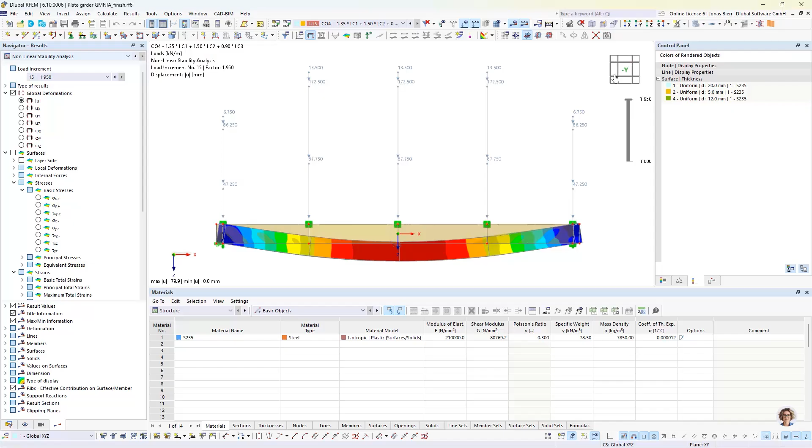And since we saved all intermediate results, we also have this slider that we can now leverage to check different results during the calculation. For example, one thing which is quite interesting is if we check the lateral deformation. I can just quickly get rid of the model and all the stuff that we don't want to see.

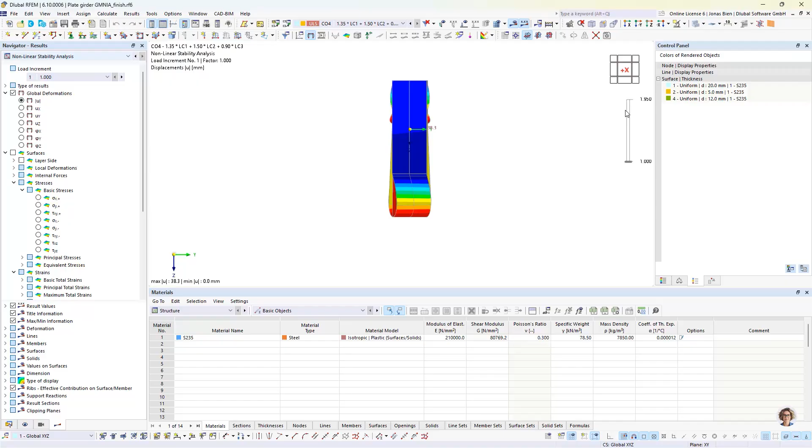But you can also now animate the deformation over the course of the simulation. This is also quite a nice feature, and what we see as we approach the maximum load factor is that these lateral deformations of the compressed flange escalate. They really increase a lot with a small increase of load. So this would already, from looking only at the deformation shape, give us some indication that probably lateral torsional buckling is the failure mechanism here, and is the reason that after this load step, no more additional load steps converged, so to say.

We can also check the load deformation history, the global one, for example. We can display a calculation diagram where we compare the load factor with the maximum deformation, and we can see that the stiffness of our system approaches more or less zero at this point. Negative stiffnesses we cannot compute with our solver. You need special solvers that are able to compute also the softening part. So this is probably the most that we can get with our methods of this analysis, and that would then also be the load factor that we would take for our failure criterion number 1.

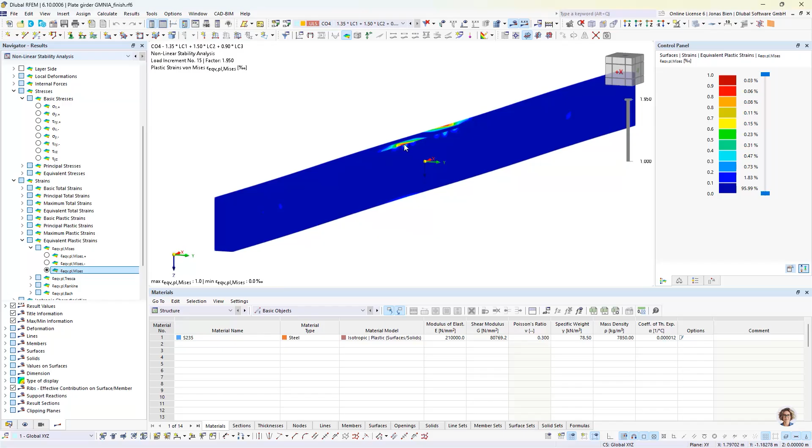And when we remember the failure criteria for GMNIA analysis according to Eurocode 3 part 1.5, there was a second one mentioning plastic strains. So let's also address this and check plastic strains in the model. And we see that at the end, so at the maximum load factor, we have strains of approximately 1 per 1,000 in the flange region, in the upper flange at midsection, so where our compressed flanges actually deform most, and also in the transition between flange and web plate.

There are only very minor strains visible in the shear panels itself. So this would not be a relevant strain-based failure criterion, and we would only check the 1.95 as a maximum of the load deformation curve against alpha 1 times alpha 2, which would definitely be lower than this. So that would be our check, basically.

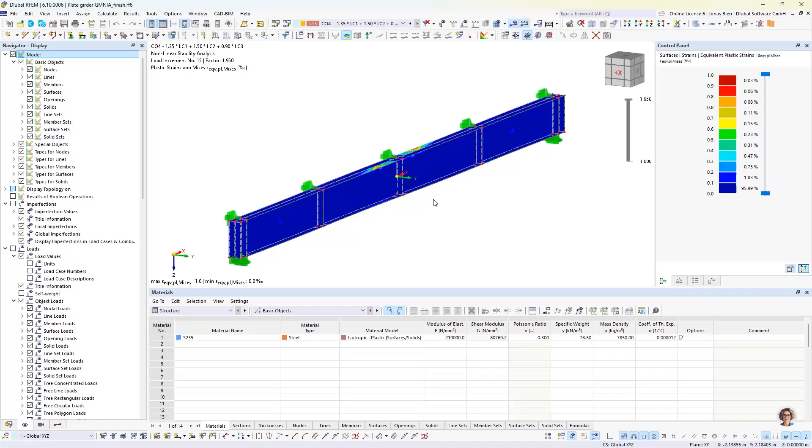So this is quite interesting for me, at least, to get a feeling for the failure mode and to check what the deformations look like during this calculation, and what happens if we push past the linear behavior of this model, and what happens then.

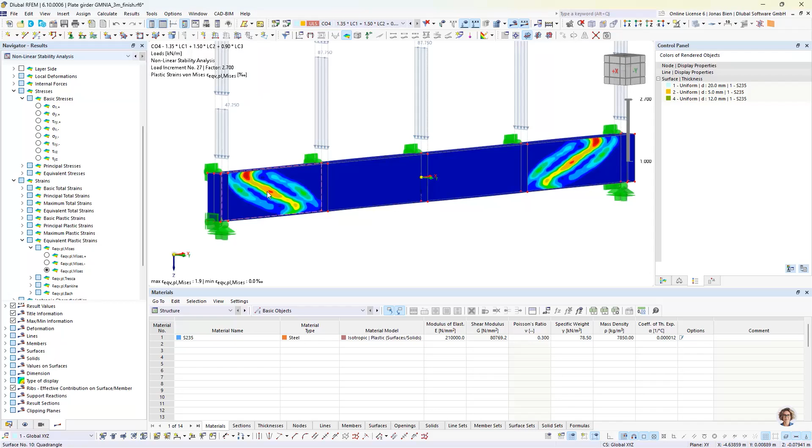And it's in the next step also interesting to see what happens when we change certain parameters. For example, I simulated the same girder with the same loading conditions, just with shorter buckling panels of 3 meters. And when assessing the results here, it looked quite different. Of course, due to our imperfection, we also have some transverse deformation occurring in the model, but they are not as pronounced as before. Instead, if we now look into our strains in the model, we see that the maximum strains now are not found anywhere near midspan, but in the buckling panels close to the supports, and those are also a bit higher already.

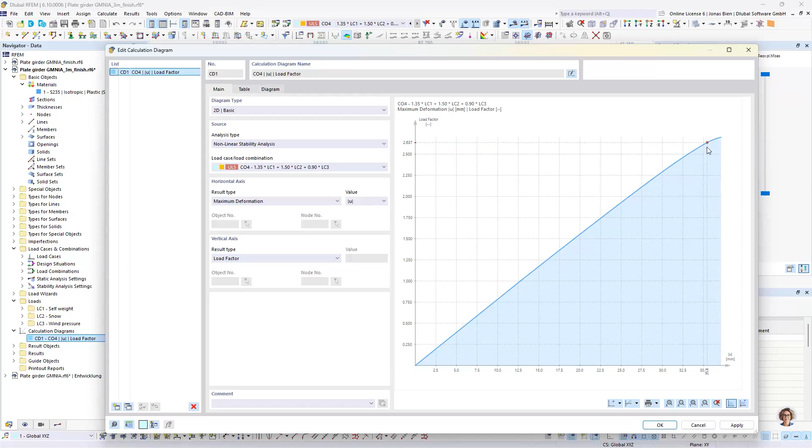They're nowhere near the 5% limit, but we can see that the strains throughout the last load increments increase drastically in these shear panels. So in this case, we could expect a whole different failure mode, not the global lateral torsional buckling mode, but rather a shear buckling mode in these external buckling panels here, as the critical failure criterion. We could also see how this nonlinearity or the excessive deformation in those shear panels affects the global load bearing behavior, and we can also see that the stiffness of the global system becomes much smaller.

That for me would be very interesting to see when these different failure modes diverge, what do I get when I change certain parameters, when I change the web thickness, for example. That's quite a nice exercise to do, and if you have a fully parameterized model, it's very easy to do as well.

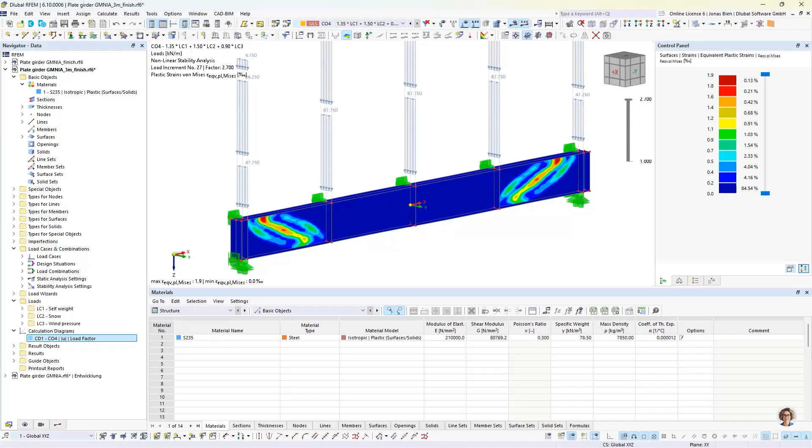That would be all I want to say regarding the results, but before we get to the summary, I would highlight that we have chosen the direction, the mode shape, and the combination of our imperfections more or less arbitrarily due to time limitations. The Eurocode, however, stipulates that imperfections should be combined in such a way that the lowest load magnification factor results from the simulation. This means further investigations would be necessary, checking other imperfection directions, especially combinations between the bow imperfection, flange twisting, and local buckling shapes.

For the initial model with 4.5 meter long buckling panels, taking a different mode shape, especially mode shape number 13, which involved deformation in the internal buckling panels, together with a member bow imperfection, and in the second step also aligning the imperfection direction of this member bow imperfection and the local imperfections, we get a slightly smaller critical load factor of 1.82. Remember that in the initial step with our initial guess, we got a load factor of 1.95. So there's quite some difference.